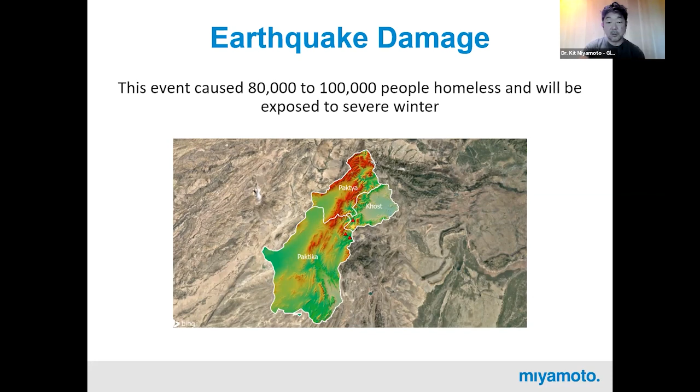The Taliban is essentially what we call the de facto authority, and we need to collaborate with them to work with the local people and make sure things get set up. So this is a collaboration with the IOM, one of the UN agencies who specialize in internally displaced people and how to deal with them.

In this particular case, the UN agency conducted a very broad scale assessment throughout the whole area for several thousand structures, but it did not have the technical data set. As engineers, we need some technical understanding of the damage index of each of the houses or buildings, and understand what the repair methodology and the potential cost will be.

Since we got there fairly late, around the end of July, we did a random sampling analysis, in this case about 550 what we call compounds, which are just clusters of housing, affecting about 2,700 families. So we used a statistical approach here.

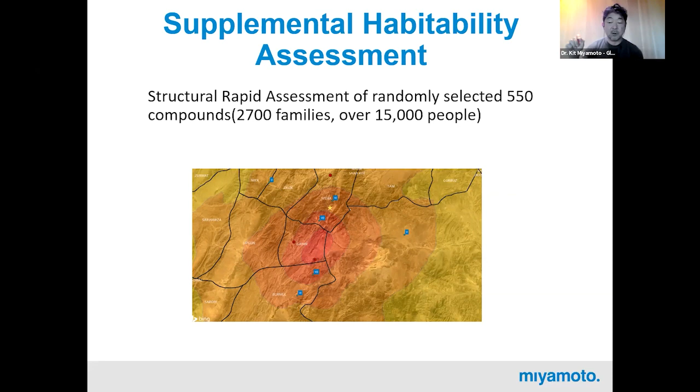We used the ArcGIS platform and Survey123, programmed into it, and trained around 30 local engineers to go out in the field and collect very specific structural data: what it's made of, what type of building system it is, what the damage patterns look like, what is the way to fix it, and the potential cost of fixing it.

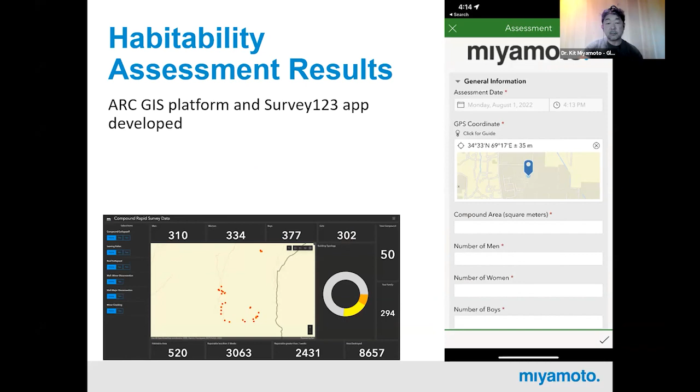Once you collect the data, you put it into the ArcGIS format like this, so you can see the red, yellow, green distribution. Red is a heavily damaged compound, yellow is medium, green has nothing. So you can see the patterns. We use the remote satellite image to understand the overall scope of damage, just doing a sampling technique.

It depends, but you definitely want to collect a minimum of 2% of the total distribution. In this particular case, we went up to about 5 to 10%, so we have fairly decent confidence about what happened to the whole affected area.

Based on this, we see the so-called red tag, which means collapsed or heavily damaged, for about 17% of the total assets in the area. And 51% is yellow, which means damaged but repairable. And habitable means there's no immediate damage; you can repair it and use that facility.

It's about 32%. So interestingly, first, it was a pretty big disaster in the area because the last earthquake they saw was some 120 years ago. So it's an earthquake-prone area, but the local people really didn't know it's an earthquake area per se, right? So everybody really panicked, and a lot of buildings collapsed.

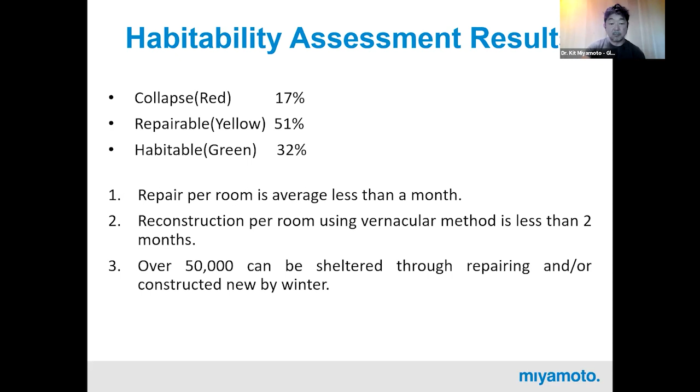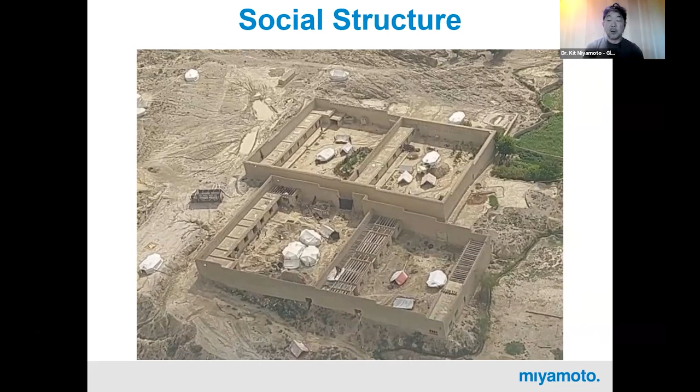So here's what a compound structure looks like. Essentially they look like a large castle almost, and on average about 6 to 7 families live there. It's not the same clan per se, and it's made of clay, because that's the material available locally. Clay and wood, that's what they use. And it's a very interesting structural system, I must say.

So the compound wall is what we call a Pakhsa wall. It's essentially locally harvested clay, pounded in where it's built to make a very stiff structure. This wall is about 5 meters high. It's a gigantic structure. And interestingly, we didn't see many collapses of this kind of wall. Estimated ground accelerations were somewhere around 0.3 to 0.5 G in certain areas, and you don't see much damage. Isn't it amazing? There's no reinforcement, none of that. It's just the way it's built, it works.

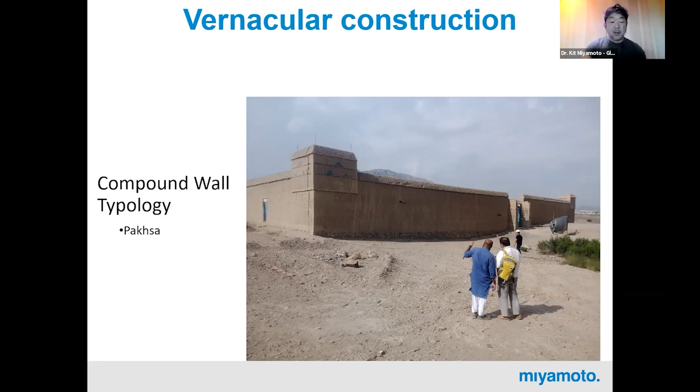And there is also the so-called clay brick structure like that. Usually the smaller buildings use clay brick. It's again locally harvested, dried clay, and they just build it up like that.

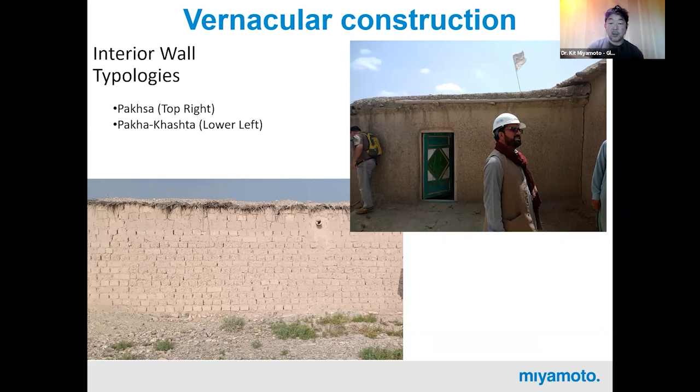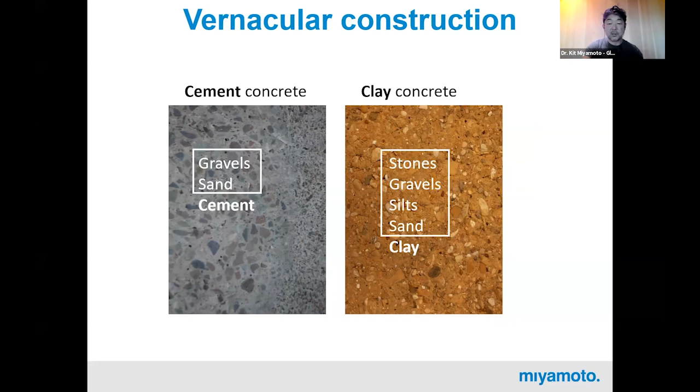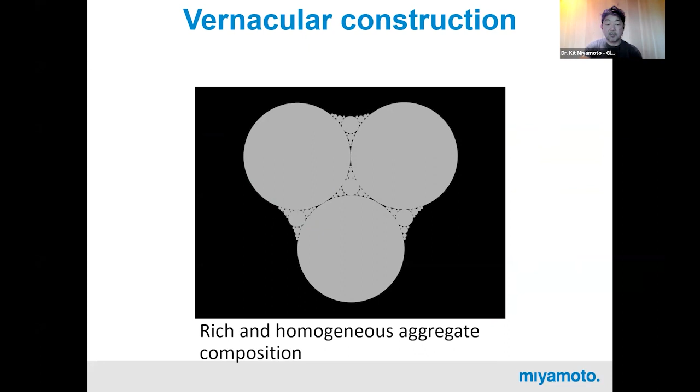So why does this construction work? Essentially clay, if you compare it against cement concrete, a lot of similar things are going on. There's gravel, stone, and sand components, and the cement or clay essentially provides the cohesiveness between these aggregates per se. So the clay combined with water and aggregate makes very homogeneous components. It's not hugely different from how concrete is made, if you think about it. But what type of clay exists is a very important component.

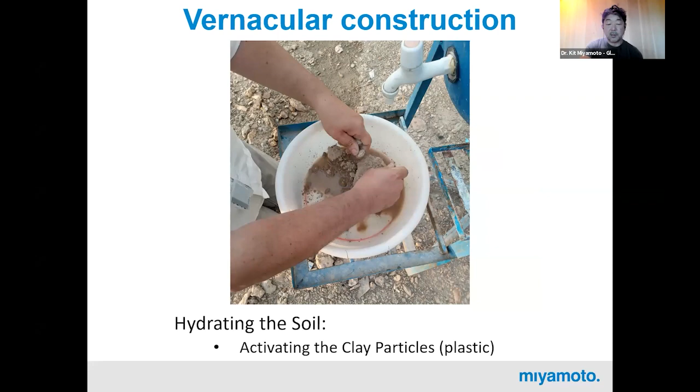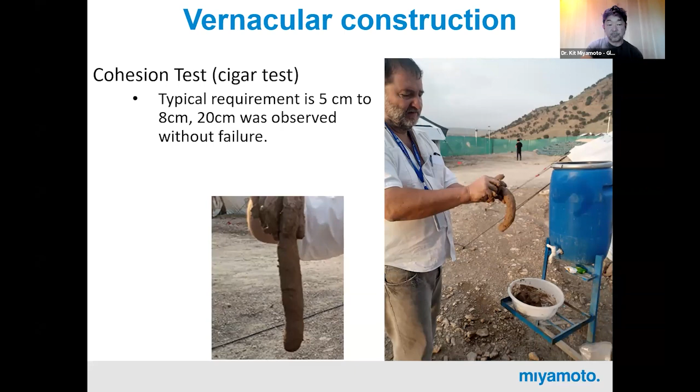So we brought in an expert from France who has been conducting clay construction for a long time. He tested it using different approaches, hydrating the soil to see how plastic it is and how cohesive it is. He makes a long piece and sees how stable the piece is. In this case, he found the cohesion held almost 20 centimeters without failure. And he was very amazed. He said, I can see why people built such huge structures in this area, because this is probably one of the best clays he's seen on a global scale as a building material.

And he looked at what the grain composition looks like. He liked it because it has very sharp-edged components. That's something that can bind better.

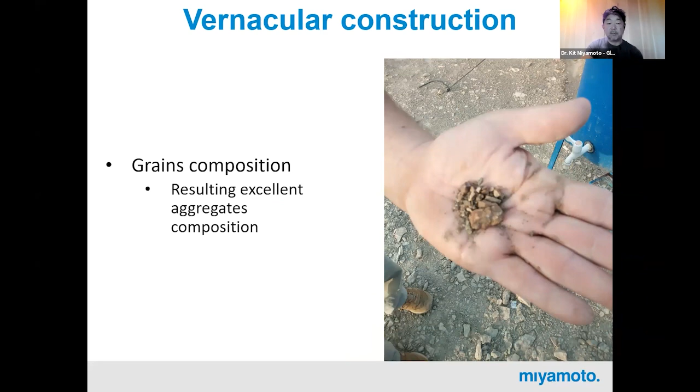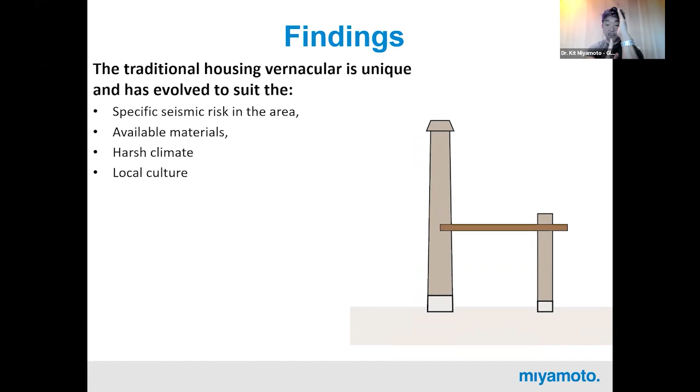So the system is essentially something like this. It's a rocking structure. What you see in a cut section is the perimeter wall, this large compound wall, and inside of it there are little rooms built around it, with wood joists connecting these two elements. This is an extremely flexible structure, by the way, very flexible. And the dynamics are essentially a rocking system.

It's not much different from the minarets in mosques. Essentially, it rocks. And it doesn't only rock as one unit, it's actually made of chunks of these clay layers, so there's a lot of interaction going back and forth. So it's a very stable structure. Even with simplified analysis, we see that it can take up to 0.5 G, but it's probably much higher because the compartments themselves have to interact with each other.

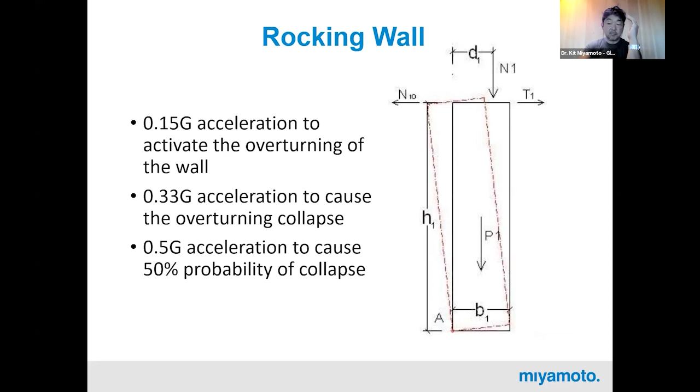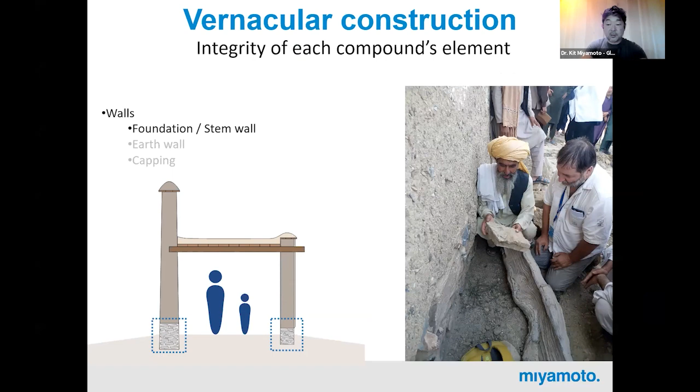So how does each system actually look? What are its critical components? We see the critical components: the bottom piece of it, which is made of rocks. That's actually very important because clay, if exposed to water, melts. So you cannot expose it to the water. Having the rock foundation is a very important part of it, as you can see right here.

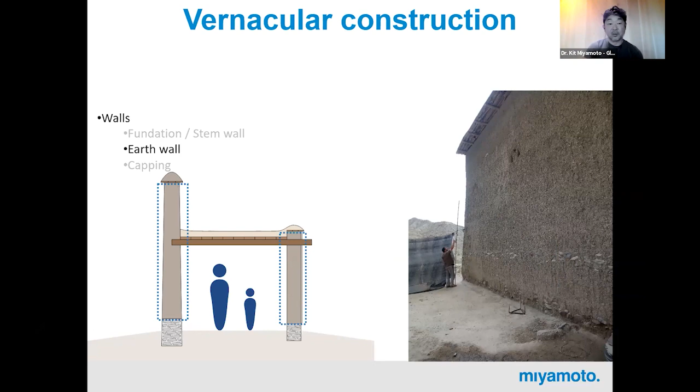And also how the earth wall is made and its coverage. In many cases, they build the clay, and after that apply a plaster mixture, which is usually composed of clay and hay, stuff like that, essentially to make water drain faster. You can see how tall the wall is. Pretty amazing, isn't it? Those are usually 5 meters high.

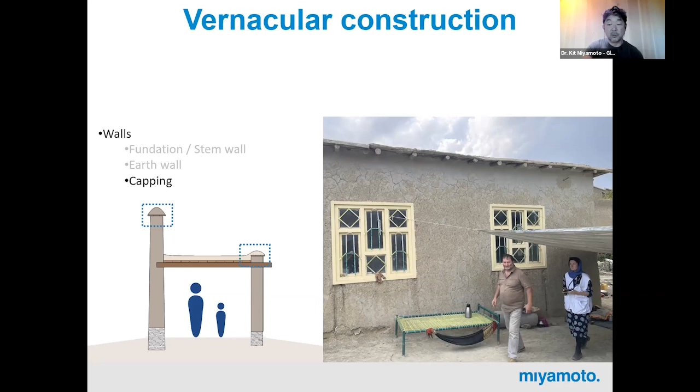Capping is an important one. That's how you keep the water from going into the inside of a wall. That's actually critical, protecting the wall as much as possible. And soil coverage over the roof, that's important.

But one of the most critical failure modes we saw here is that over the years, people built this clay on top of each other, essentially for heating. It's a really cold area, reaching about 3,000 meters or so, so it's really cold in winter. But the problem is the layers laid over it; in some cases you see it as thick as 2 meters.

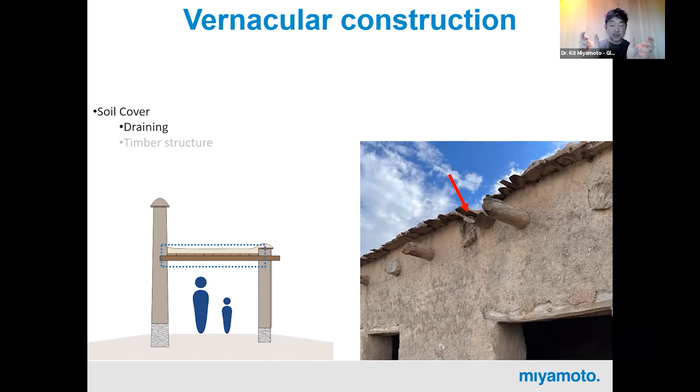I'm talking about a heavy roof, and in some cases you see the joist structure. This particular case is pretty good practice, showing pretty good bearing, but in many cases there's no bearing at all. So you see it collapse like that quite a bit. So those are some of the things they don't do quite right. But it's a very flexible structure.

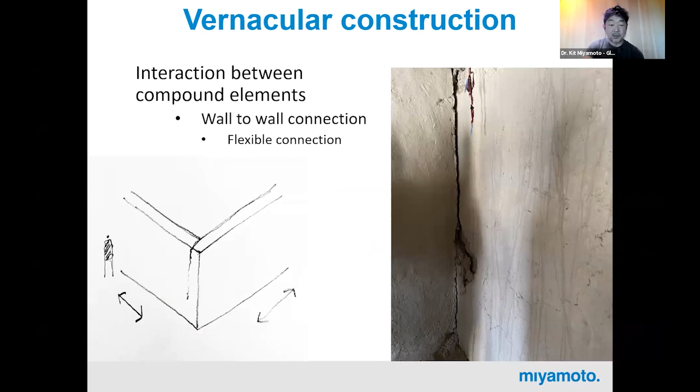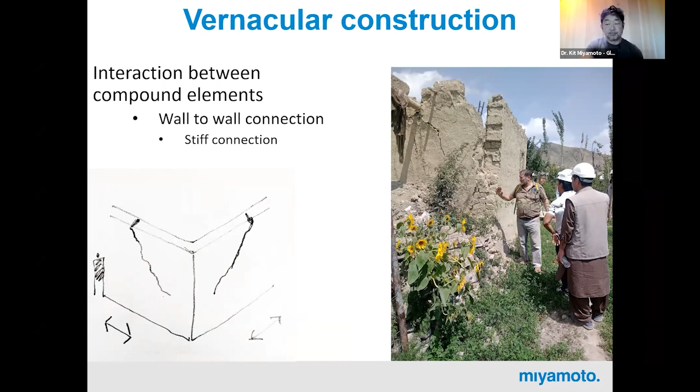You see a lot of cracked sections, which I like. They're very stable cracks; the sections just work independently like this. I don't see any problems with it, and it can be fixed really quickly. This is a little bit stiffer condition, like this. This is probably not as good as the vertical ones we see. I like the vertical ones because there's a lot of energy dissipation going on.

So one thing we noticed is that the basic material is good; they have good clay. And if they build correctly, this can perform really well, because we saw many structures that performed very well. Obviously, this particular archetype has been developed over millennia, right? Thousands of years people have been living here, and that's the only thing they have, and it's gone through earthquakes for thousands of years.

So therefore, if the construction is done right, using the right technique the forefathers used, this is a very resilient structure. So in our opinion, there's no need to bring in cement. There's no need to bring in rebar, or anything like that. First of all, no one can afford to buy anything like that anyway.

So the solution here is to use vernacular architecture like this one and make sure the best practice is extracted and widely disseminated to the population. That will not only address the current need for shelter and quick repair, but also impact the generations to come in how to build this way, which they already know how to do, right?

For example, don't make the roof too thick. Once there's a leak in it, remove it and put it back. Just no more than, say, 8 inches thick. I think things like that are really critical. Make sure the rock foundation is there so water doesn't go into the clay.

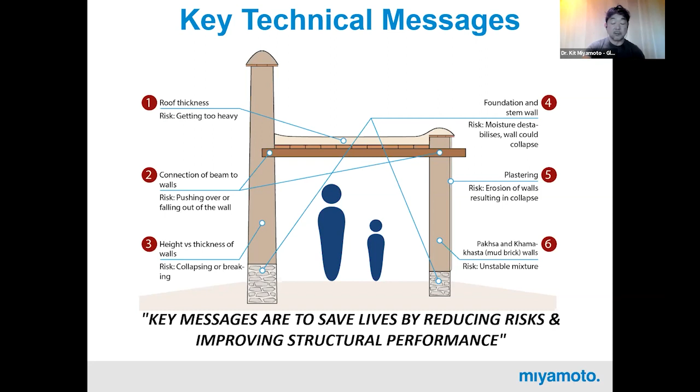So this is at September 4th, the last time I was there. We have a team though, both a local and an international team working with the IOM and others to do this work right now. About 14,000 families are affected. As for their needs, such as tents, there's plenty of it, 40,000 supplied, right? It's almost covered, so everybody has a tent. Huge amount of tents out there. But tents are not good enough for wintertime.

So the resilient shelters, essentially what we're talking about, is to repair the repairable structures, which is going to affect almost half of the total stock. But unfortunately, there's a funding gap of about 6,000 families right now still, so it's not reached yet. Right now, there are 8,000 capacities. It should be around probably 2,000 or maybe 3,000 units repaired using these methodologies.

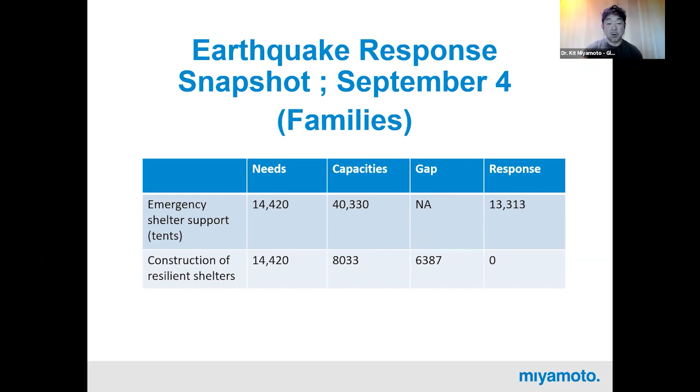One of the most important things is the so-called key message we provided. We worked very closely with the shelter cluster system in the UN. I think it's a very important one. So not only our organization or IOM doing things, but the main different partners in the cluster system use it. I think that's a very important coordination part of it: to have a singular message to the community about the correct way to reconstruct and recover.

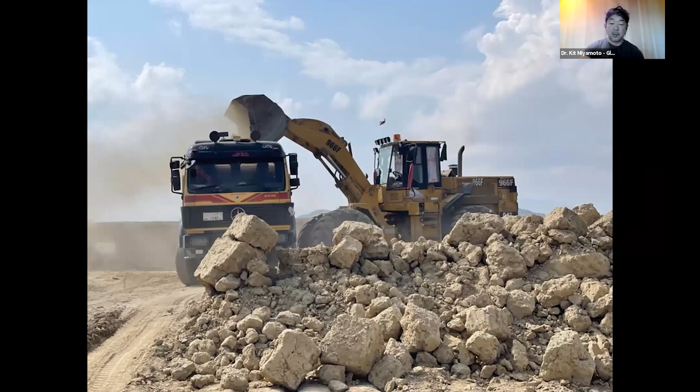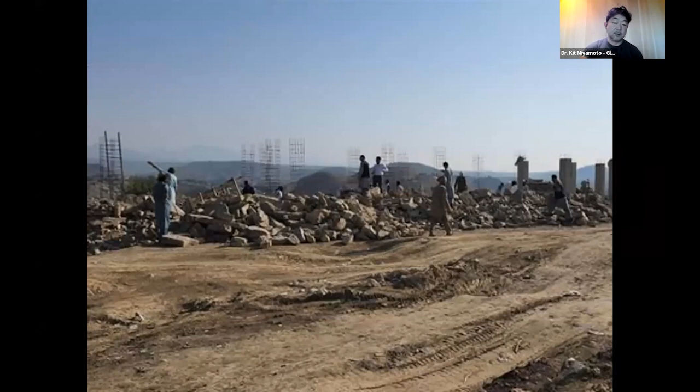You can see some of this is bad practice, by the way. One UN agency actually came to this one community and destroyed about 1,000 units, just destroyed, because they said those clay buildings are not good. They needed modern structures, brought in the bulldozers, built some concrete structures. They said that's progress. It's a disaster. The problem with this approach is that people cannot build this way ever again. It's a one-time solution, really expensive, and an environmental disaster by itself. This is a remote community; bringing in the equipment is a huge effort. And it also destroyed the social structure.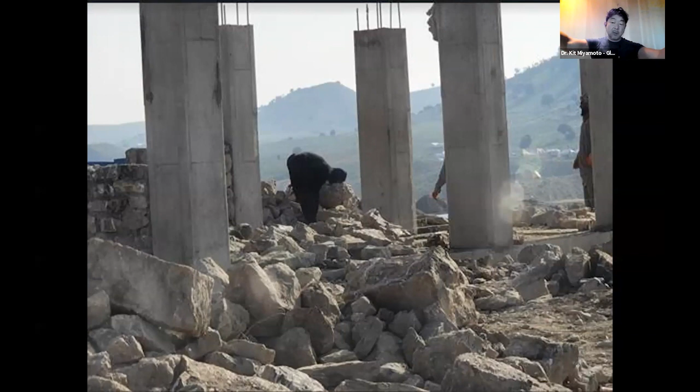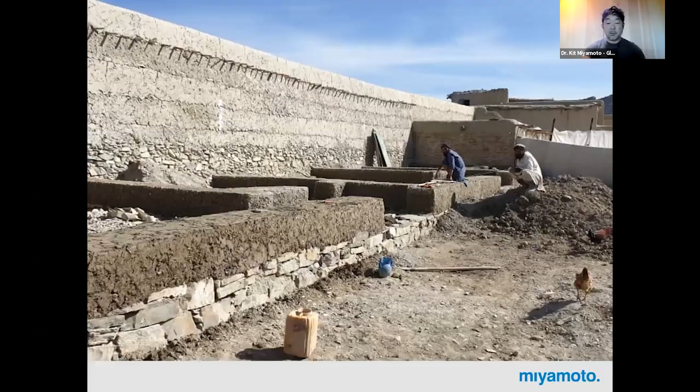We talked about the compound wall system; people live in a compound with high walls. It's a very private residence. That's how the social structure is. That's where the women can be free. This is a Muslim country, and that's how the culture has been made up for thousands of years. Women can come out, but they're completely free inside this compound wall. But this approach takes everything down, and there are some little concrete boxes. I think that's a crime. It's just ridiculous. Things like this I see all the time, and it disgusts me, quite frankly. But that's just a small part of it. Many of our UN agencies do the right approach.

We actually self-funded about 15 different compounds. We have a nonprofit called Miyamoto Global Disaster Relief, and we raise money. We want to show what best practice looks like, because agencies sometimes move slow. So we picked 15 different compounds and trained the locals. What we did is this: we first estimated what the cost of the repair looks like. Usually it averages about $10,000, because that's a pretty sizable compound, about 2,000 to 3,000 square meters.

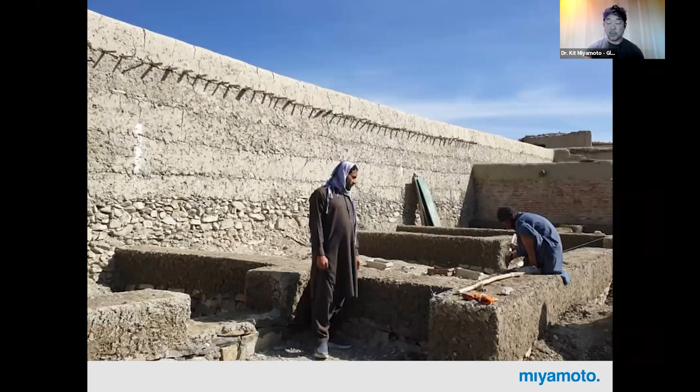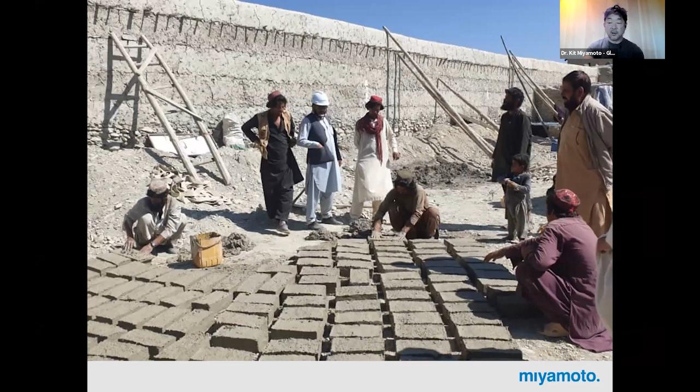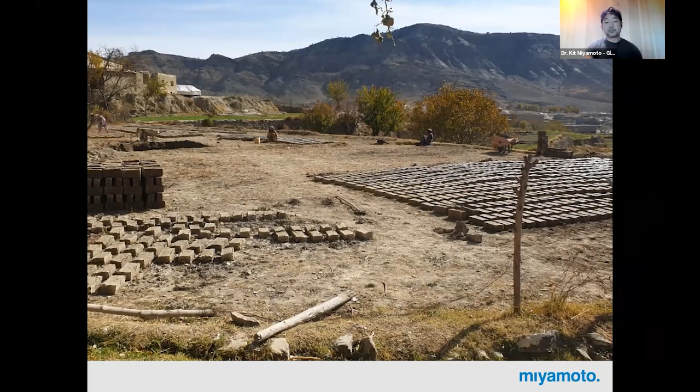We provide money in tranches to the homeowners. They select and hire the local masons, in many cases family members. They bring materials, and we train the masons and the family members. We monitor them, but it's managed by the homeowners because the money goes there. I think that's really important. Money goes directly into it rather than to contractors, especially in a place like this. And families given money try to be as smart as possible, obviously. So the money stays there because they hire their families and friends, and there's capacity for that. So the construction, there is a beautiful structure.

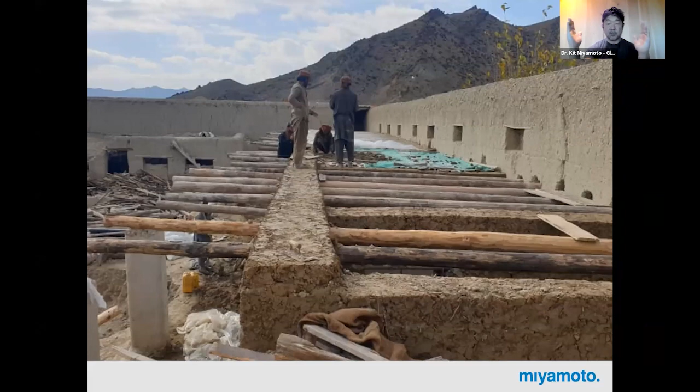You can see that it's a very stable, very thick wall, and it's fairly small and compartmentalized. So the actual room itself is very stable as long as there's good bearing of the wood. Those walls can move around, it's not a problem, as long as the roof itself is sound. So after I put the joists in, put some wood planks,

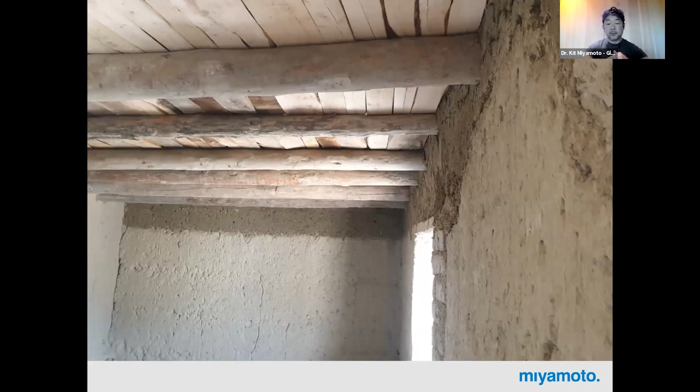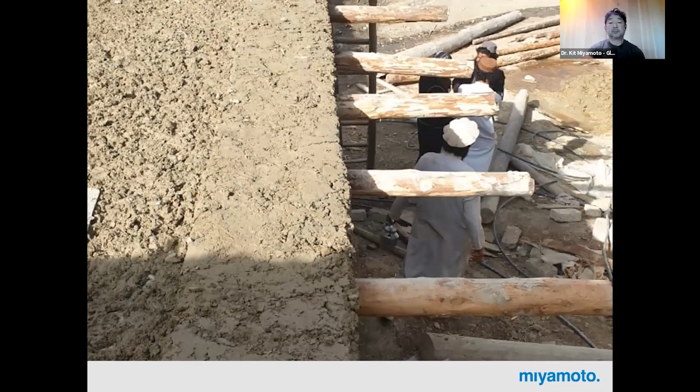then provide the plastic sheeting. This is something they do throughout. Then have one layer of clay soil roofing. It looks like that. It's pretty amazing, isn't it?

I thought it's really cool, so we didn't invent anything here. We didn't bring any foreign materials or foreign knowledge, none of it. We just extracted what is the best practice that already exists. People are already doing it. Some people say, I know exactly how to build, I don't understand why people don't follow that. That kind of statement you hear quite often.

So far we've trained about 370 masons in the whole affected area. And so that knowledge, which they have, becomes renewed, and they are going to keep doing this. So yes, it's definitely able to impact these particular villages, but the knowledge staying where people are, I think that's a very important component of it.

Really fast recovery is critical, and the money has to stay, because money is important because people have no jobs, nothing after that. This can just happen, right? At the same time, the knowledge stays intact, stays there to affect the future generations to come. So that's how the Afghanistan work is going on.

We got a little more funding from a UN agency, so we're going to continue throughout with our team. Our teams are mainly composed of Afghan engineers and our contractors, by the way, with a couple of internationals involved. They're going to keep fixing these houses this coming year also.

So Ukraine. After Afghanistan, I spent quite a bit of time in Ukraine for the last three months or so. And it's very different. This is not a natural cause, obviously, it's caused by Putin and the Russian attack. And it's pretty brutal things they go through there today.

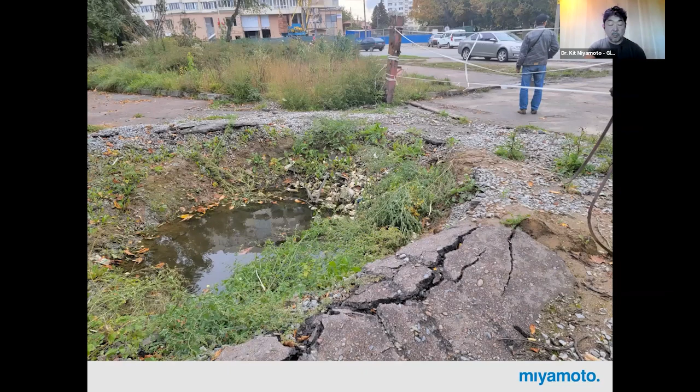And you can see big holes like this. This is caused by an aerial bomb, just huge impact. Sometimes holes are deep; I saw one as deep as 5 meters. Huge craters everywhere. And for some reason industrial facilities are being hit a lot. Every village, every town you go, huge facilities like this one are gone. And big shopping malls also. No one knows why those things get targeted, but shopping malls, industrial facilities, schools, large apartments are big targets for them.

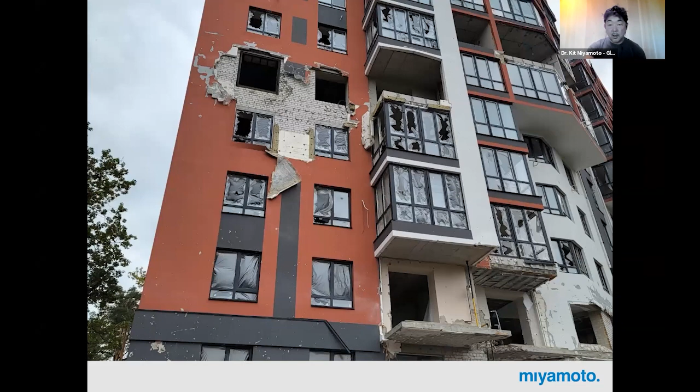But much of the damage, although this looks bad, is actually fairly fast to repair, because the damage comes from external pressure. In many cases it's caused by an aerial bomb that hit the street. The damage is limited to the windows or finishes, so there's no structural damage or anything like that. So some of the damage can be repaired fairly quickly, even this one here.

So we are targeting right now programming with UNOPS and also IOM to really look at apartment buildings like this one, to repair these so-called partially damaged structures, so you can bring the residents back to the apartments, and the people who still live there are able to live safely. I think that's a very fast way to get people back.

I mean, the Ukrainians say that Russians can break as much as they want to break, but we go fix them. They are pretty amazing, I must say. One blast I was talking about, I heard in a hotel, caused a huge, gigantic hole in one of the main streets. It was a Monday morning, by the way. By Tuesday morning, everything was fixed, and cars go by like normal. It's super fast fixing they do.

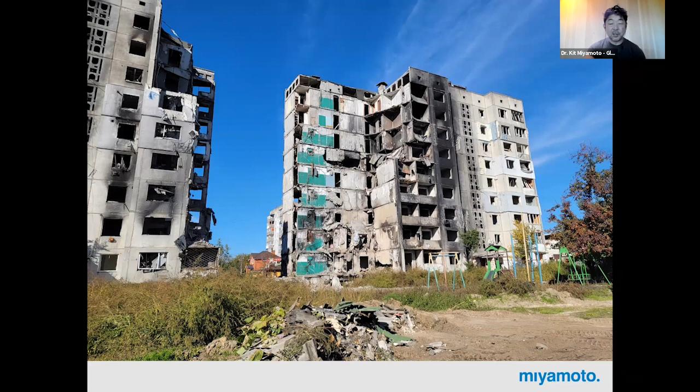And as for critical infrastructure right now, as you know, many substations and grids get hit, but teams are repairing them right the next day, even as they're being hit. You see a lot of fire damage like this one. Those are a little more costly to repair, but it can definitely be done. Once it comes to this, it's probably not; the damage is just so intense. This was caused by an aerial bomb, and the challenge here would be demolition. Just September this year, Ukrainians for the first time actually banned the usage of asbestos in construction material.

That's something, asbestos is, as you know, cancer and potential cancer-causing elements. Places like the United States or Japan and many countries banned it probably in the 1970s or even beforehand. But it's been used widely, so every single structure, every single house, there's asbestos involved. So the challenge is the demolition of these apartments containing this very toxic, hazardous material. How are we going to demo it out?

Obviously we can't do what we try to do in the U.S., so-called enveloping everything, abatement first. So there's a certain approach to it. We've been working with an asbestos expert to see how to moisturize first, and how to actually remove the elements. There are certain ways that can be done. It can't eliminate the risk, but it can reduce the risk of exposure.

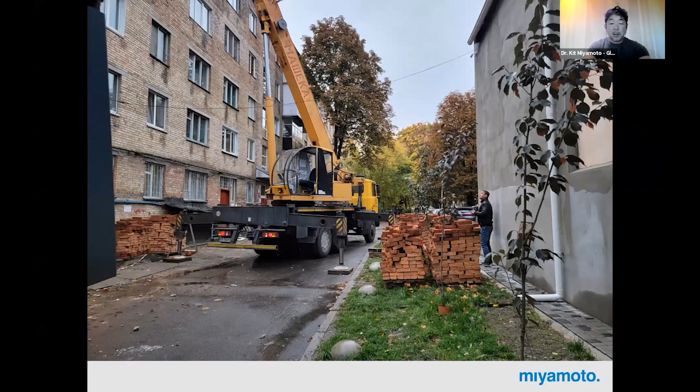There are half-burned apartments on top, and the local government does have capacities. It's not like they're waiting for someone to come rescue them. So they have tax money for now, which can probably change. But whatever they can fix, either schools or even private apartments, they're fixing it.

I was talking to this former business owner in the Kharkiv area, which is at the east front line. The area was occupied for almost 6 months and liberated just recently. So he lost everything he had. No factories, nothing, everything's gone. But he had a little money, and he decided to fix those apartments.

And he was using the exact same strategy we thought would make sense: out of 100 or 150 units, maybe 10 or 20 units will be burned. But if you fix those 10 to 20 units, everything can be safe to be occupied again. So he's using his own money for public good. Pretty amazing people, I must say.

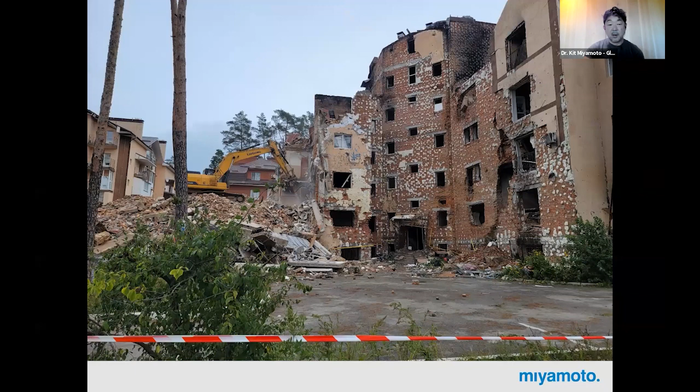Here's one of the demolitions going on. It's just pretty dangerous. There's no control. There's no watering, no moisturizing in the area, just dust flying all over the place. No control at all. And we all know there are certain asbestos components in an apartment like this one.

You can see random shootings out there. And the longer the territory was occupied, the worse the brutality. Whether it's part of a tactic or just the way the Russian army behaves, I don't know. But their method is just to destroy and kill as much as possible. That's something I saw. But Ukrainians keep coming back.

I was talking to this lady on the east front line. She just came back with her 2 kids. She actually felt safer in the village now than in major towns because you don't get missile hits anymore. I asked her, why did you come back? Her answer was, well, it's my country. It's my town. It's where I live. So that's the people out there.